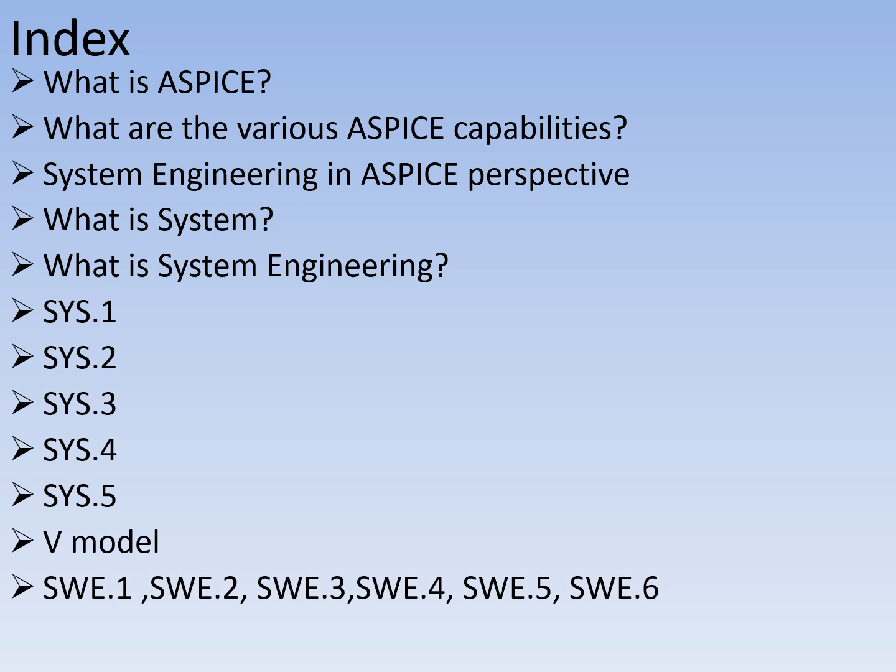Okay, first of all, what is ASPICE? What does ASPICE stand for? ASPICE, or as it is commonly referred as automotive spice, stands for automotive software process improvement and capability determination. If you see the acronym properly, the acronym itself is very self-defined. But anyway, I will explain elaborately a little later.

It is an automotive standard based on ISO 15504 and also the ISO 330XX series of standards. Automotive Spice allows the organizations across the automotive supply chain to assess and improve the capability level of their own processes as well as those of their suppliers. In simple words, A-Spice is a standard or yardstick through which an organization can measure the efficacy of the processes of their suppliers or the process of their own company also.

In practice, automotive spice allows customers, OEMs and their multi-tier network to assess the process of their suppliers during the selection process. So, for example, if you are an OEM and you have several tier 1 companies which claim to be of equal standard, but you have to select one vendor, one tier 1 company. So what is the yardstick? What is the measure through which you decide, okay, this is the best tier 1 which is suitable to supply their product to me?

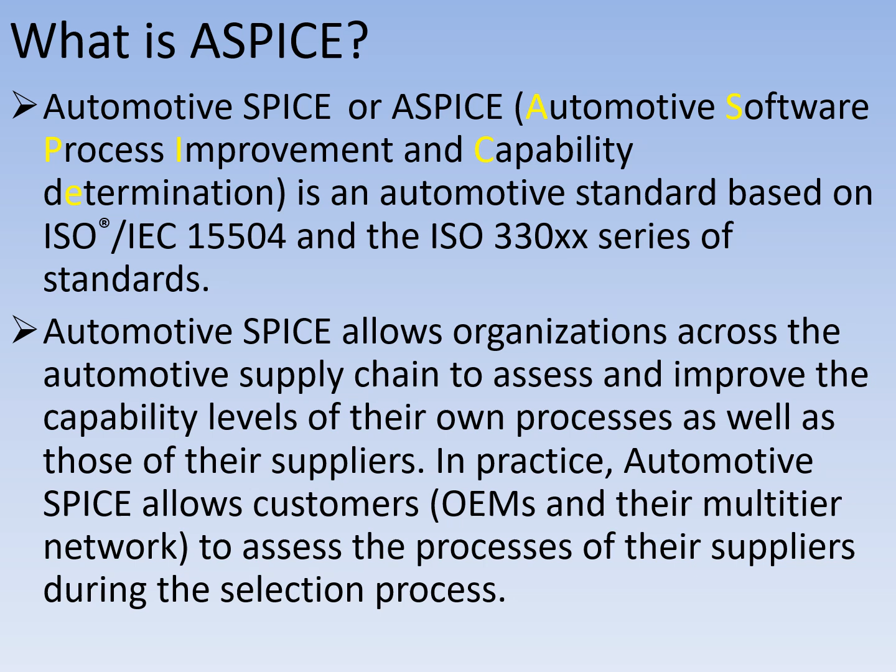That yardstick is A-Spice. I'll tell you what are the various scales of A-Spice in the coming slides. A-Spice has 6 capability levels in total, going from level 0 to level 5. Level 0 stands for incomplete process and level 5 stands for innovating process.

A-Spice is increasingly becoming widespread in automotive industry with many OEMs and their multi-tier networks requiring all their suppliers to at least have automotive spice level 2 with plans to achieve level 3 for future projects. So nowadays it has become a common understanding that a tier 1 company, to claim that it can be a suitable vendor to an OEM, must be of minimum A-Spice level 2. I repeat, a tier 1 or tier 2 company, to become a vendor of an OEM, should be of minimum A-Spice level 2, and many OEMs are planning to achieve level 3 for future projects or in future in general.

At least till now in whatever companies I have worked, we have reached level 2 only, and the last company I worked, they were also striving to reach A-Spice level 3.

Now the below figure clearly depicts the 6 levels of automotive spice and additional process attributes required for assessment of each level. So what is level 0? Level 0 is incomplete. It means that there is no process which is completely established. Level 1 means it is performed to a good extent, but still there are some process differences and discrepancies which cannot be fulfilled.

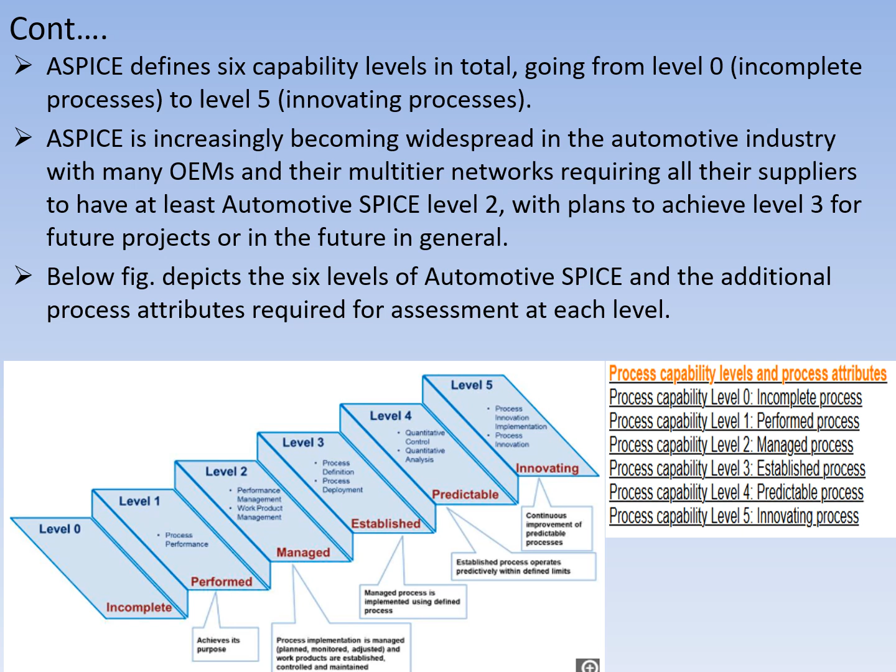Now, what is system engineering in ASPICE perspective? The ASPICE system engineering process group is a set of processes that ensure systems are developed in a structured way. I will tell you what exactly a system is. Of course, everybody knows what a system is, but in automotive product perspective, there is a very clear cut definition of system, which I'll be explaining a bit later.

The process is based on V model and includes the following steps. Again, I assume many people are familiar with V model, but nevertheless, in the later slides, I'll be explaining what V model is. But for now, understand V model is a systematic process through which you develop a system.

And this structured way to develop a system has various steps. The first is called system 1, or SYS1 as it is usually pronounced. It is requirements elicitation. Requirements elicitation means the process of gathering requirements for a system. What is the meaning of requirement? Of course, in ordinary English, everybody knows what a requirement is, but what exactly is the meaning of requirement in this particular perspective? We'll touch upon it in the coming slides.

And next, what is system requirement analysis? The process of analyzing the system requirements. So who will be analyzing the system requirements? Where does SYS1 end and where does SYS2 start? All these things I will be clearly explaining. But for now, please go through this list. SYS3 means system architecture design, the process of designing the system's architecture.

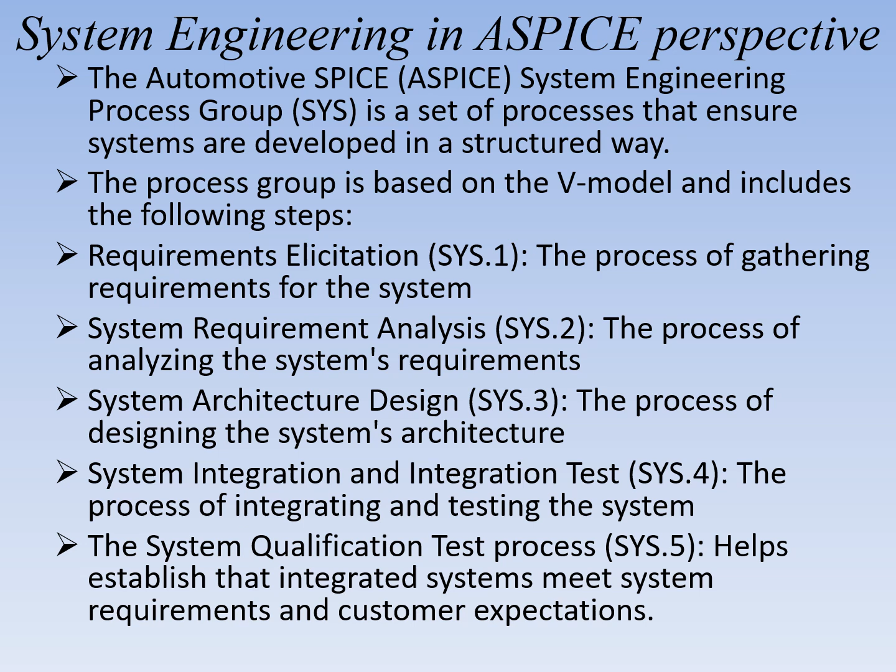Now what is meant by V model? The system's development life cycle is represented graphically by the V model. Again, I assume many people know what is meant by V model, but let me slightly elaborate. The V model is used to create project management and development life cycle models that are rigorous. So to develop a complicated system, this V model is very useful. Actually, the V model has its origin in Germany. It is a general testing model, and as per the US government standard, there are three main categories into which the V model can be divided.

Now, what exactly is this V model doing? The V model captures the primary actions that must be performed in tandem with the associated deliverables inside the project lifecycle development or computerized system validation framework. This is the definition; I just read it out. To elaborate, you have to clearly understand that there is a deliverable at each and every step of the development. In the previous slide, I told you what is system 1, system 2, system 3. At the end of each system level or system gate, there is a clear-cut deliverable. So we have to ensure what actions must be done to ensure a proper deliverable.

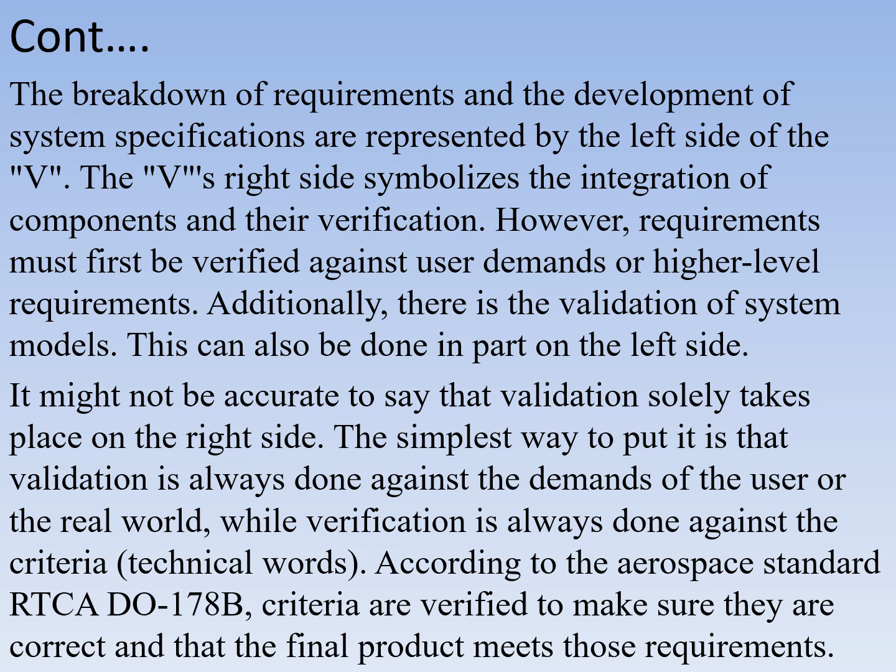In the V model, I'll just draw a picture. In the V model, you have seen the various levels. At each and every level, the output is checked for meeting the requirement. For example, system elicitation has its own requirement testing. Analysis has its own testing. And again, architecture has its own testing on the right side. So every component that is being delivered on the left side is being validated on the right side. So this is the standard called the V model.

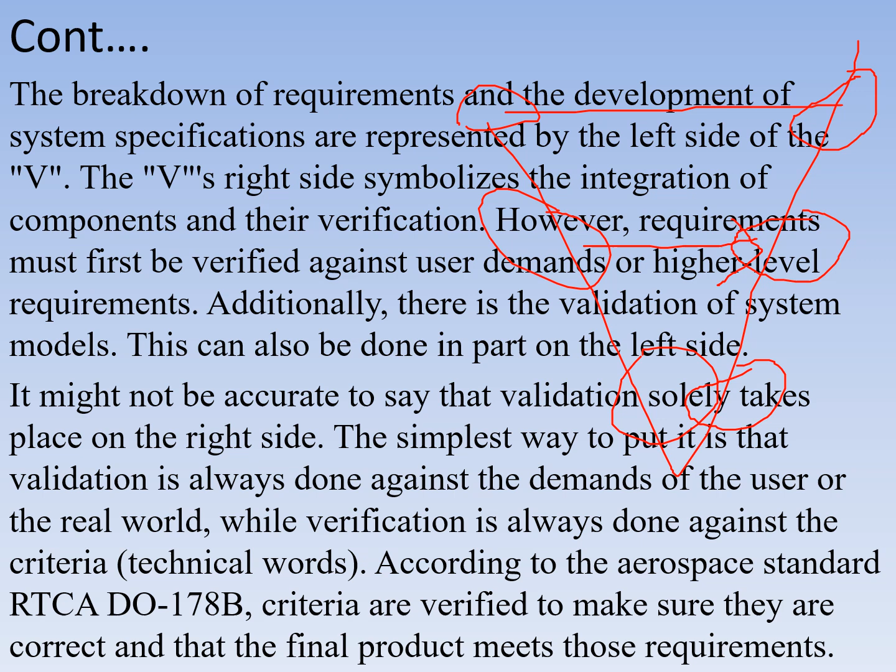Okay, now I know understanding it the first time when I'm explaining this is slightly difficult. So if you go through the V model a couple of times, you'll clearly understand. Now, what is meant by verification and validation? What's the difference between validation and verification?

Validation: the assurance that the product, service, or system meets the needs of the customer and the other identified stakeholders. It often involves acceptance and suitability with the external customers. For example, you buy a car. The purpose of a car is to take you from point A to point B. Now, if I am driving a car and the car is successfully taking me from point A to point B, I can validate that the car is delivering its purpose.

Now, what is meant by verification? Verification means the evaluation of whether or not a product, service, or system complies with the regulation, requirement, specification, or imposed condition. Now, this is more like a legal term. This is something which is internal, which internally has to be taken care of. As an end customer, I don't need to care whether a vehicle is meeting Bharat Stage 6 norms or Stage 7 norms. I can just drive the car.

But as an OEM, you have to verify that a vehicle is meeting the Stage 6 norms or Stage 7 norms, and that is called verification. A vehicle manufacturer has to ensure that the vehicle is meeting all the legal requirements. And legal requirements do not mean only emission requirements. It can be manufacturing compliance also. It can be maintenance compliance also. So the point is, verification is strictly internal, and validation is something which an external stakeholder justifies.

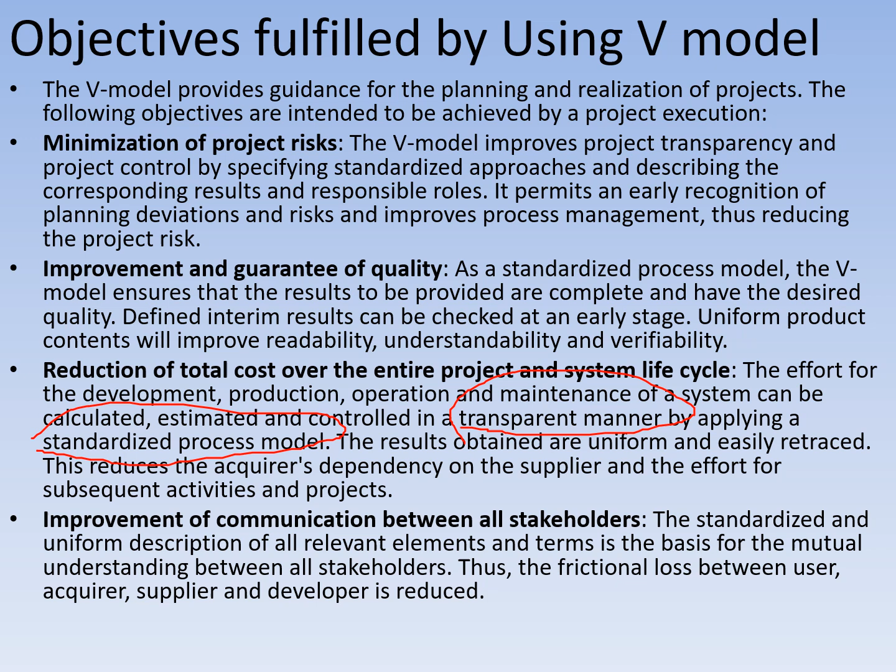System engineering and verification. So at last we have come to system engineering and verification. Now what is meant by system engineering? The system engineering process provides a path for improving the cost effectiveness of complex systems as experienced by the system owner over the entire life of the system, from conception to retirement. Now what is meant by conception here? Here I'm talking about the requirement elicitation.

And when you say retirement, in this perspective, we can say retirement means acceptance of the system by the end consumer. But it also means till the end product is scrapped. For example, if you buy a car and after 8 years, I may scrap the car. That also can be referred to as retirement, because when you develop the system, you have to take care that even after it is bulk productionized, even after the product goes to the customer end, it does not have any problem. That is what is referred to as retirement.

It involves early and comprehensive identification of goals, a concept of operations that describes user needs and operating environment, and a thorough and testable system. This word is very important. A thorough and testable system requirements. Now, how do you develop the system requirements, testable requirements? What are the various use cases? All these things we will be touching upon as we go to the SYS1, SYS2, SYS3 level.

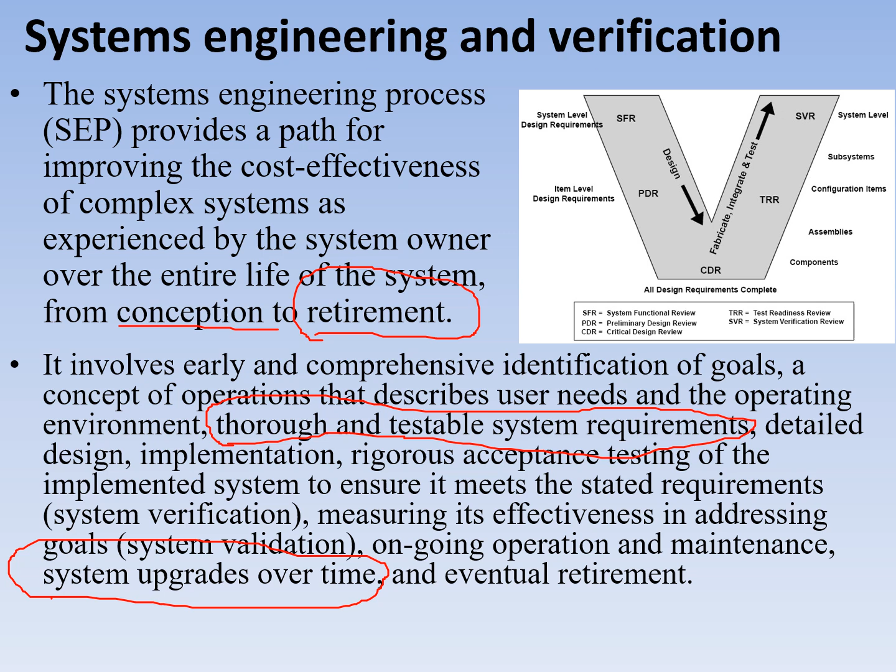Let me give one example where a system can be upgraded even after the consumer buys it. The system is called over the air. Even after a consumer buys a car, the software can be upgraded over the air by the OEM. That is what is being referred to here. Even developing such a system becomes very easy when you follow this system engineering procedure.

Now clearly understand that every requirement must be addressed by at least one design element. So there must be a proper design component, a component which is clearly designed to meet the requirement, and there must be a proper test, a proper internal test. Here, what am I referring to? Am I referring to validation or verification?

I'm referring to verification. So an element should be clearly allocated to an acceptance test so that it can be tested and it can be given to the end customer, that this design component will serve the purpose without any future problem. Such rigor ensures nothing is done unnecessarily and everything that is necessary is completed. And that is taken care of by system engineering.

So you have to make sure that every act, every task you are going by is absolutely necessary and you are not at all doing anything unnecessary. It is important to do everything necessary and to eliminate everything that is unnecessary. And that is what system engineering clearly takes care of.